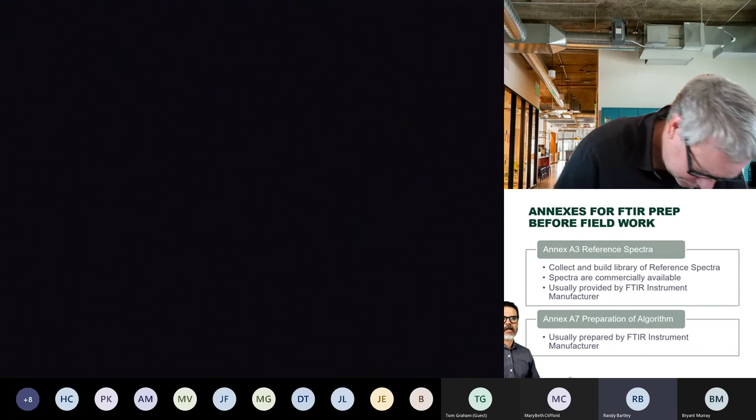So before you step out into the field, you're going to have Annex 3 and Annex 7 taken care of. Annex 3 is the collection of your reference spectral library. This is typically commercially available and typically provided by the FTIR instrument provider.

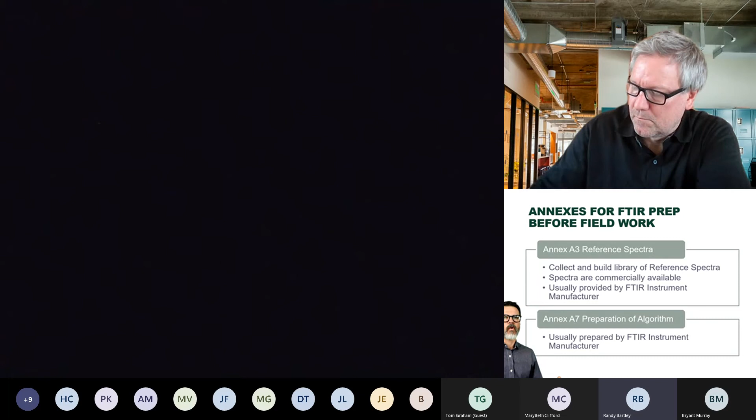So we use MKS instruments for our FTIRs currently. Their MG2000 software program has all of this loaded up for us. We can get our recipes for gas sources or diesel sources, modify the recipe or the method within the software program to look at different sources that are burning or running off of different fuel sources.

And then Annex 7 is the preparation of the algorithm to quantify the data that the analyzer captures on the day of testing, or during testing, I should say. So after you've got those, typically provided by the manufacturer, you would get into Annex 1, which would be your test plan.

And these are simple things like what's the applicability here? Are you testing against a regulation like Quad J? And if so, how many test runs are you going to do? 3 1-hour test runs with your sample being recorded every minute over the course of the 1-hour test run.

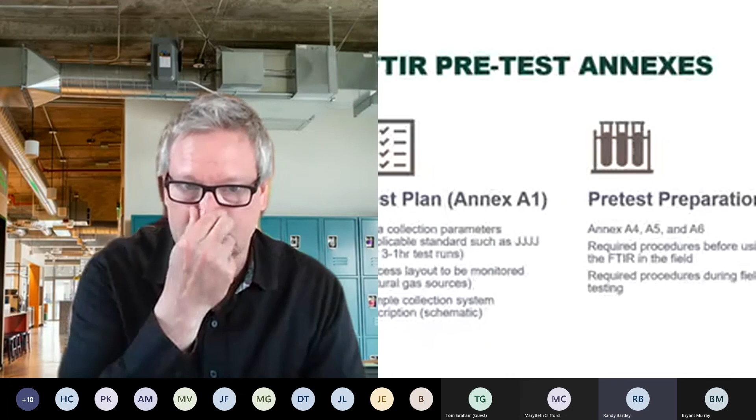You'd want to identify the source that's being tested. You'd want to have a process description of that source being tested. You'd have a schematic of your sampling system. You'd want to know how high the point of sampling is from grade and access to the stack and test ports. You'd want to have a good analysis of any safety concerns or safety issues before you get into the field.

Other things that you kind of want to know is what's the approximate moisture content of the effluent or the stack you're going to be sampling from, possibly want to know what the CO2 content is, and that will deal with some of the ranges in which you're going to look at during sampling.

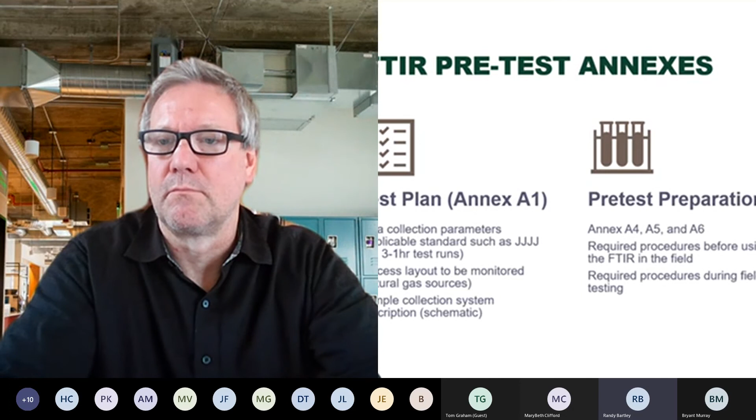Pre-test preparation that occurs on a daily basis in the field is kind of a combination of Annexes A4, A5, and A6. And I want to stop right there. Again, I mentioned these annexes don't flow linearly or in a process. When you look at Annex 1, that defines your pretest.

But these annexes kind of skip around. So if you're reading the method and trying to say, okay, I'm reading the data quality objectives in the annexes, it doesn't really go in order of how you actually conduct a test. So want to make that clear.

The way that we're going to present is actually in that process flow as to how you would want to prepare for and conduct a test.

So annexes A4, A5, and A6 have your pre-test requirements, starting with getting a background of your instrument in the field. So you flow nitrogen, you want to have a baseline level for all of your target analytes, for your moisture, for any tracer compounds that you're going to possibly use for your spike recovery.

And as a general practice or best practice, we like to take screen captures during these daily checks and dump them into our test report.

This was something that MKS trained us to do when we started using FTIR analysis. This was also something we used with Prism Analytical, which is now part of Montrose Environmental Group.

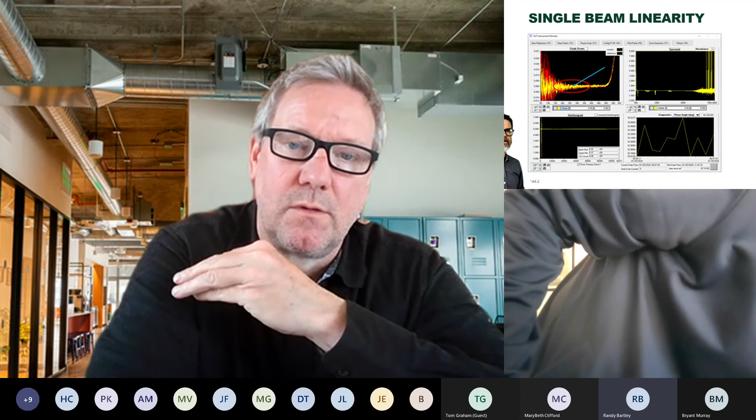We used them to do all of our Annex 8 data validations when we first started doing our FTIR analysis, and I know some of those folks are on the webinar attending today. So a lot of our best practices came from going through training with them, and we still stick by these practices.

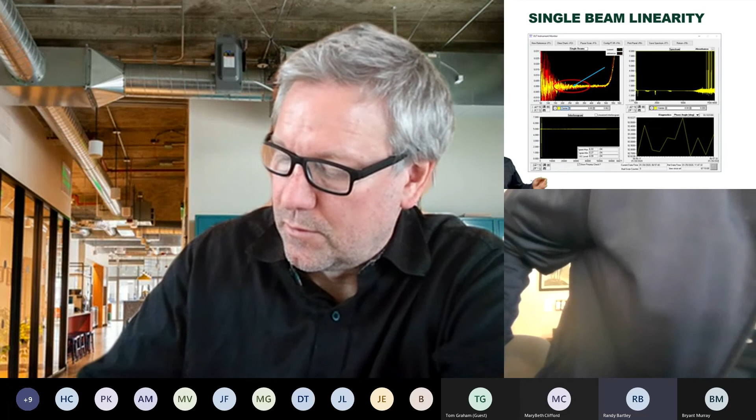So you'll find these screen captures in our reports looking at single beam linearity. What we're looking at in this top left portion with the red circle and blue arrow is the voltage of the FTIR at 250 inverse centimeters, and we're trying to make sure we're within plus or minus 0.005 volts. If we're not within that range, it means the analyzer is not linear.

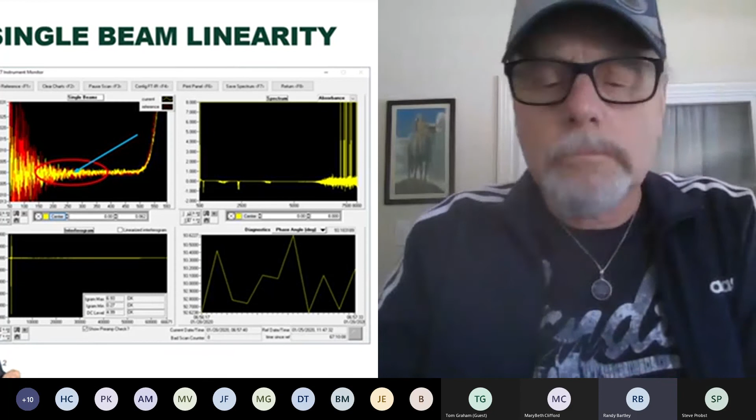I want to put this in the simplest terms as possible. With your traditional EPA reference methods, you would typically do a 3-point calibration for any compound of interest to prove the instrument has linearity. Well, with the algorithm and software here, if you're calibrating carbon monoxide at 50 ppm, you can stand by that calibration, and because of linearity within the software, the assumption is that if you were seeing 500 ppm of CO, the instrument is calibrated to that level as well.

Some other checks and screen captures that we put in: we want to see what the single beam max intensity is. Looking at the upper left-hand portion of the screen, circled in red, shows that we are at about 1.6 volts of single beam strength. When we drop below about 1 volt, we know our instrument needs to have some maintenance done.

We could have dirt, dust, or some type of particulate within the gas cell, or maybe we took a slug of moisture within the gas cell. It could have fogged the mirrors. You could have moisture contamination on some of the internal windows, all of which will affect the single beam strength. So as that intensity degrades, it's an indicator that you've got maintenance to do on the instrument.

And then one of the last checks we take a look at is the water peak analysis. This shows us how good the resolution of the analyzer is, how good our pictures of the spectral analysis are going to be once we take a look at this.

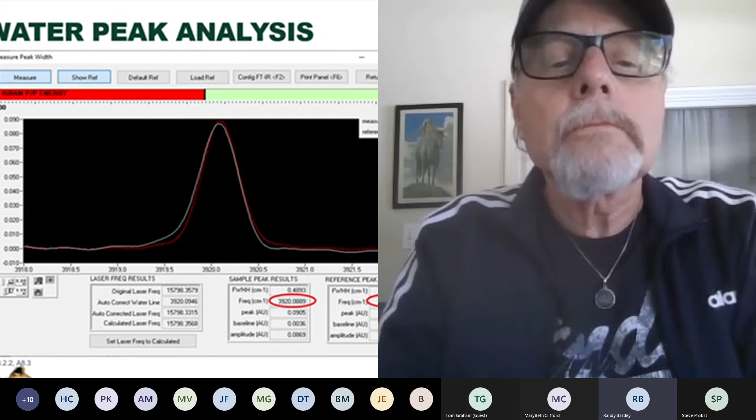We also look at the original laser frequency versus the calculated laser frequency, and the waterline frequency, and compare those. Again, these are very quick checks, taking less than 5 minutes to really take a look at these things, but they are indicators that if things aren't looking right, we may need to do some maintenance on the instrument before we can continue with our testing.

So continuing on with Annex 4, this is where we get into using a calibration transfer standard, typically ethylene as a calibration gas. This is a great direct in-system check on the analyzer. The method says we would run some ethylene or CTS directly to the analyzer, to the gas cell, and through the system. We're checking for leaks here, looking at system performance.

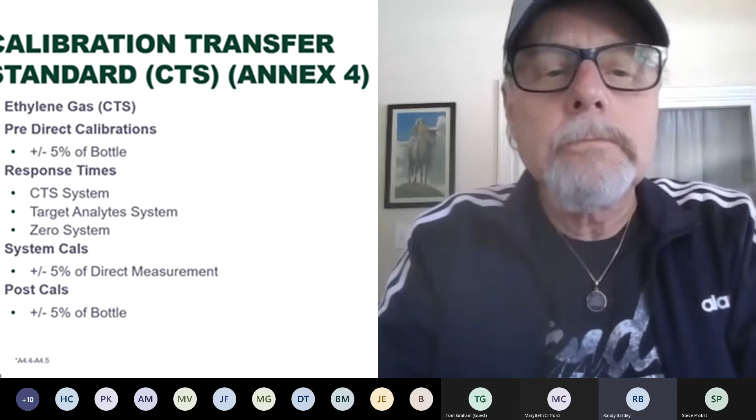We are also getting the mechanical response time of the sampling system. You can see on this screen the top box showing ethylene, showing the cylinder value, and the box below that the direct measurements. The pre-test CTS reading was 99, almost 100, and our bottle value was 96.3. We want to be within 5% of the bottle value there. So we do that on a pre-test and a post-test capacity.

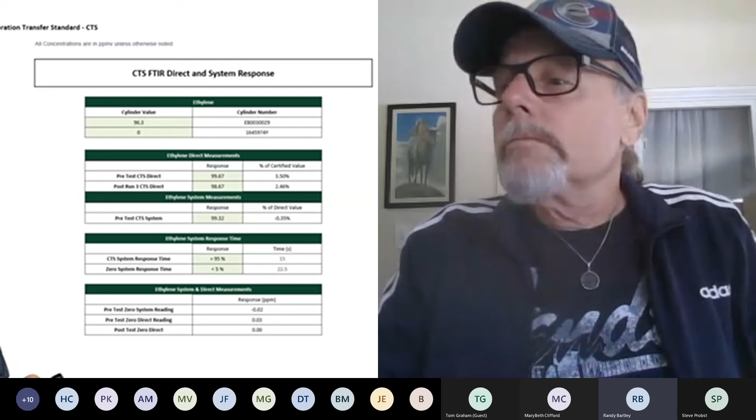And then we also do a pre-system test, again running the CTS, the calibration transfer standard, through the entire sampling system, getting our mechanical response time. We see here that we had a 15-second rise of the CTS through the system, 15 seconds for us to achieve 95% of the bottle value. Then we run a zero gas or nitrogen through the system to again see how long it takes us to drop below 5% of the CTS reading.

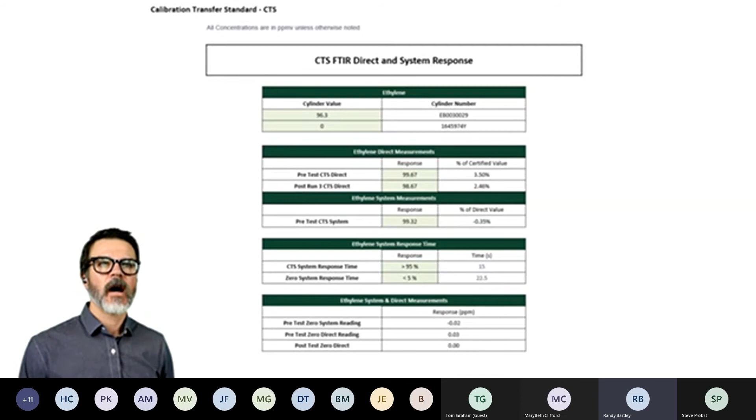So we do these checks again on a daily basis, and not only do we do them with ethylene as a calibration transfer standard, but we also take a look at all of our target analytes. For a Quad J test, you're looking at CO, NOx, and you'll use NO as a calibration gas. You'll look at propane for your VOCs, and then with Quad Z applicability, you'll look at formaldehyde.

Currently, you're allowed to use surrogates. So for formaldehyde, you'll get a calibration gas, and typically acetaldehyde is used as a surrogate. The reason being, acetaldehyde is a little more stable within a bottle, and you have a longer certification as far as that bottle expiring and not being able to be used.

So this is one of the elements that has been discussed in the rewrite committee—whether surrogates are going to continue to be allowed when there are commercially available, readily available compounds that are exactly what we're looking for.

So again, same procedure as the CTS. You do a pre-direct calibration, a pre-system check, get your system response times, and do a post-direct calibration. The post-direct calibration and pre-direct on your target analytes is not a requirement. This is something that we do as a best practice to ensure that we are seeing everything that we want to see within the test program.

So this slide again just shows from one of our tests that was conducted recently that we hit all of the requirements of the method. Feel free to review this at a later time—we really want to get into more of the meat of what we're looking at.

And this screen here, Annex 2—this is something that gets missed sometimes, I think, from service companies—is how to appropriately conduct your minimum detectable concentration for your target analytes per your test program. There are 3 different ways currently within the method to determine your minimum detectable concentration. We're going to walk through an example of MDC number 2, which is a very commonly used calculation of your minimum detectable concentration.

Essentially what you're doing is taking 8 samples through the system by running nitrogen through the entire system. You wait for all of your target compounds, your moisture, to equilibrate—you really want everything at 0 or as close to 0 as possible. And you set your scan time to an equivalent time at which you're going to be sampling for your test. So again, for a Quad J test, if you're doing a 1-hour test with recordings captured at 1-minute intervals, you'd like to do this MDC at that same 1-minute interval.

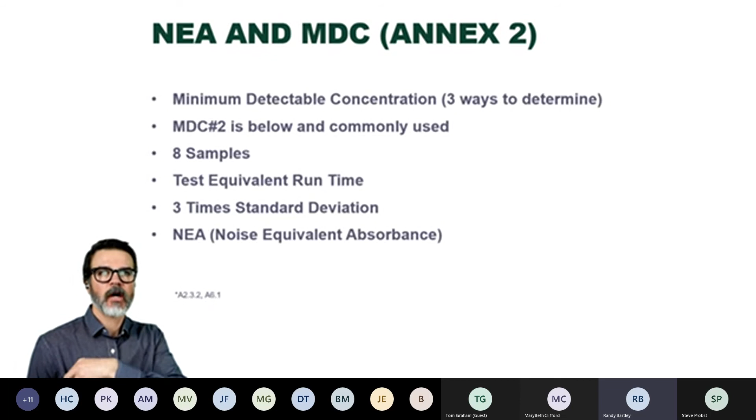This part of the pre-test calibration requirement takes about 10 to 12 minutes once you get everything to equilibrate. Essentially, over those 8 lab samples that you're taking, you calculate the average and the standard deviation—that standard deviation is your NEA, your noise equivalent absorbance—and then 3 times that standard deviation becomes your minimum detectable concentration for your analytes.

So what we've done here in this run screen is we collected data from over 4 days of testing to illustrate to the group that when you're doing your MDC analysis, these values are going to be different from one day to the next on the same instrument.

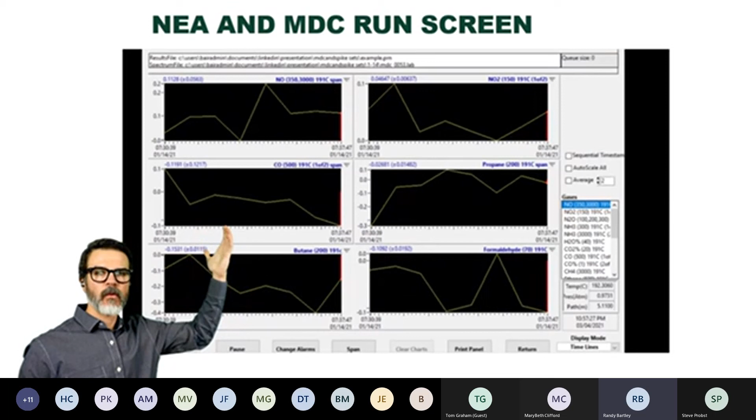So this is the same instrument, 4 days in a row, and we'll show this in a few different formats. Top left is looking at our NO, right here in this box is CO, down here at the bottom we've got butane, and then top right would be NO2, propane, and formaldehyde.

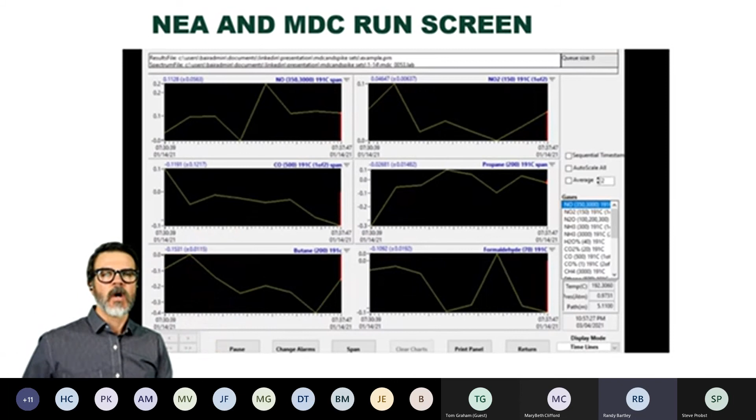So again, you can see in a run screen capacity, we can also take a look at this from a PRN... excuse me, it got hung up there. Let's see if this will run. Okay, so...

You can see here, if you look at the date column—I think we only captured 3 days here, January 11th, 12th, and 13th—you can see that we're getting the MDC each day, and we look at all of our target analytes. The PRN file is way too large to be shown all in this one screen, but you can see here you've got a good raw data log. It shows you your date and the time of sampling. Data logs, as you may or may not know, are required to be put into your test report.

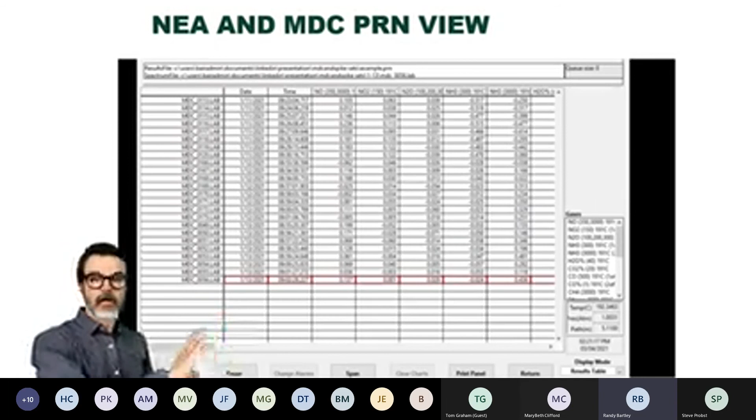And this is a great way for auditors to go and look at whether the data from the raw data logs lines up with any of the information entered into your summary tables or calibration tables. So very good information to have there.

Again, this is just one more way to look at the NEA and MDC tables over the course of 4 days, January 11th at the top left, to the 12th, to the 13th, and to the 14th. On a day-to-day basis, if you just focus on the CO column for these 4 tables, you can see that on the 11th our minimum detectable concentration for CO was 0.32. On the 12th, it was 0.21. On the 13th, 0.27, and on the 14th, 0.19.

Not great, not a whole lot of variance here, but it does matter because unlike your traditional EPA reference methods, your MDC is what calculates your system bias. So if you are not doing this on a daily basis, you are not able to report an accurate system bias on testing.

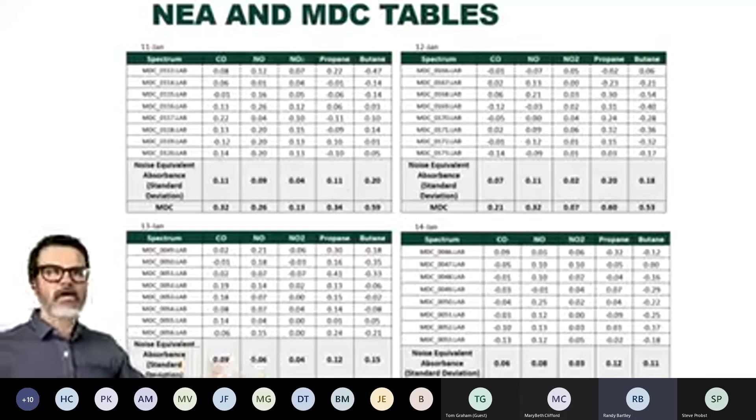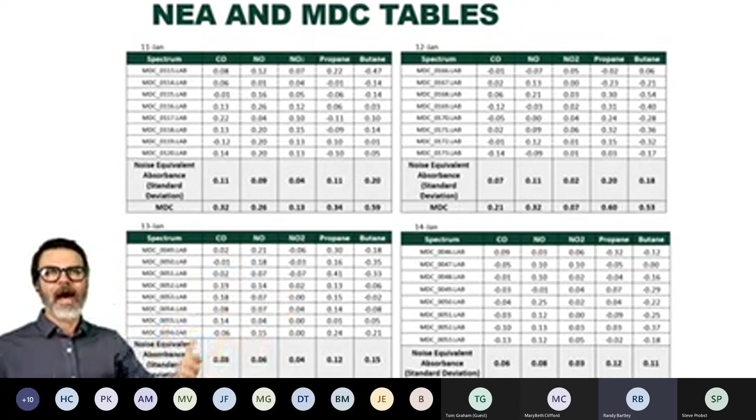When you're reviewing a report, if you see the same numbers reported day after day, and it could be an entire fleet of instruments, you would want to ask your service provider: how are you getting these numbers? Are these simply manufacturers' numbers provided for minimum detectable concentrations, or did you go through this process one time? This should be a flag to you if you are not seeing this process done on a daily basis.

Moving on to Annex 5, doing a spike recovery. This is done to test the transport system. We're looking for leaks here, and we're looking to see if we have an equipment malfunction. There are 2 primary ways that you can do this.

You can either use a tracer compound, such as sulfur hexafluoride. SF6 is commonly used as a tracer compound to do this check. If you don't have a tracer compound blended into a calibration gas cylinder with your target analytes, you can use mass flow controllers that are calibrated to NIST standards. There is a way to do it without a tracer compound.

It's pretty easy to get this done with the tracer compound, and I'll explain this a little bit more as we go through this. The tracer compound also helps to calculate a specific dilution factor.

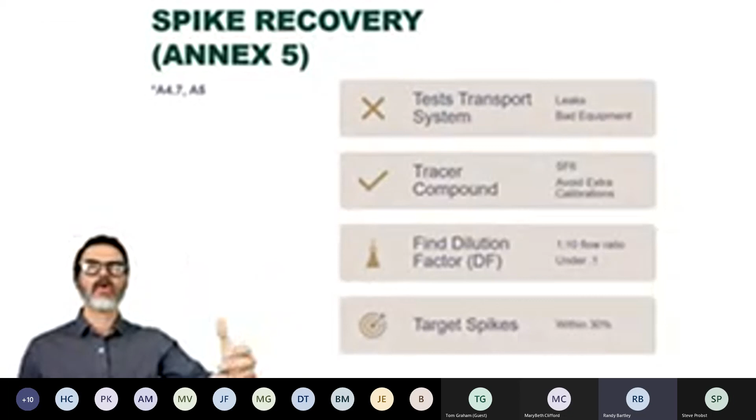So when you do this process, essentially, I'll try to put this in the simplest terms. The first part of this check is you position your probe within the stack, and you get a native concentration of what the stack is saying for the target analytes you're looking at. So you record data looking at your CO, your NO, NO2, propane, formaldehyde, whatever your target compounds are. You want to find out what's in the stack.

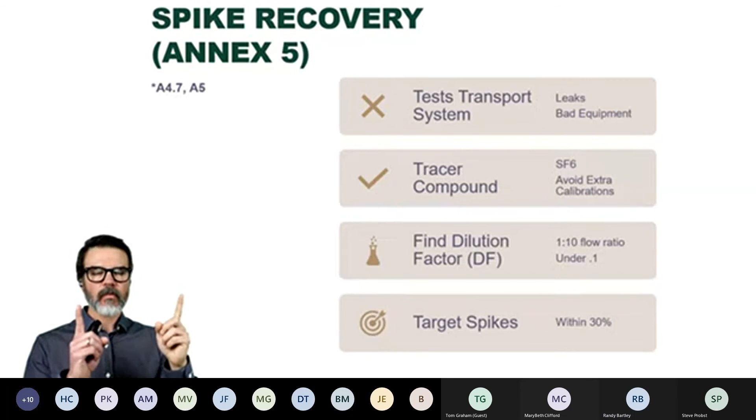Then you come back with a calibration gas bottle that has very high levels of those target compounds blended with a tracer compound like SF6. You spike that cal gas through the entire system, overflow the probe, and then you're looking for a certain value to come back for a specific target. You need to be within plus or minus 30% of an expected concentration.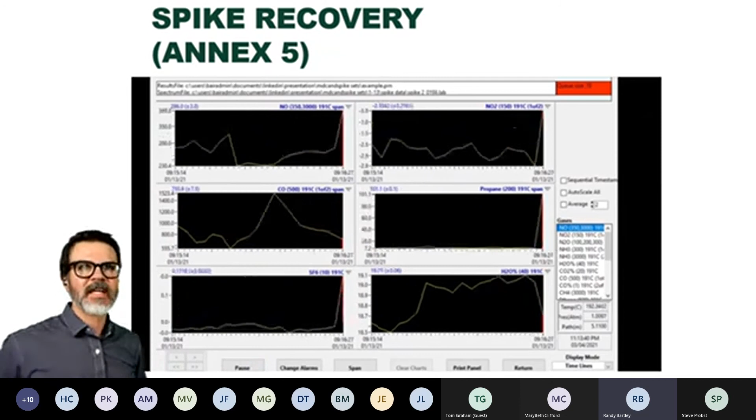So again, you can see this number rise, and you see all the other target compounds rise once you introduce that high level gas into the system. Feel free to watch this screen over and over again to get a better sense of what's going on here and seeing those analytes rise.

And that's important again regarding mass flow controllers if you don't have that tracer compound.

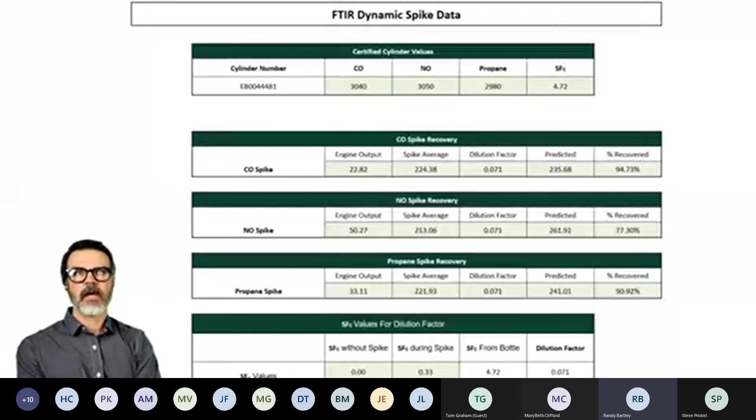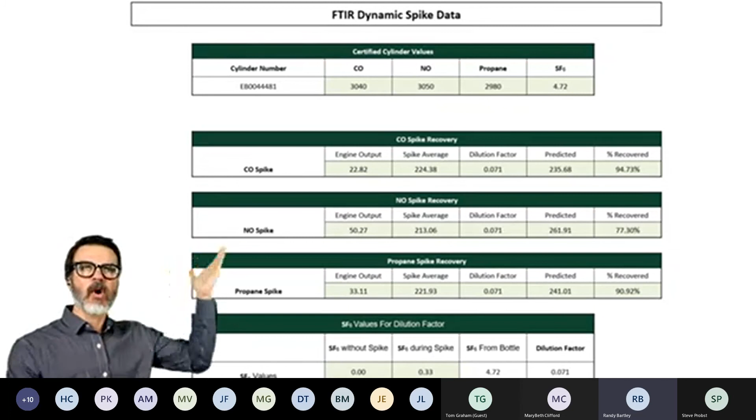So with the spike recovery, looking at the CO box, top middle of the page here, the engine output was roughly 23 ppm. And so we put in a high range CO level, 3,000 plus ppm, and we got a dilution factor of 7%. You want to remain below 10% according to the method. So you're getting 90% of your stack concentration and 10% of this spiked in cal gas. And so we predicted that we would see roughly 236 ppm for full 100% recovery of the system.

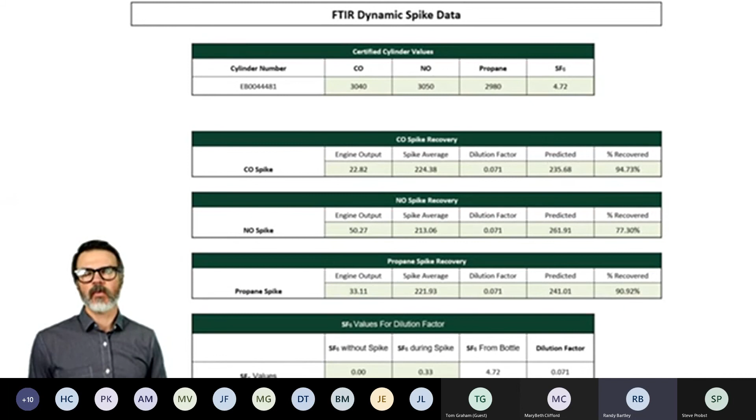On CO, for this spike recovery, we saw a 95% recovery. Again, you need to be within 70 to 130% recovery, or plus or minus 30%. So great recovery on CO, very, very well within the acceptable limits.

Our NO spike, you can see it was a little bit lower. Engine output was 50 ppm. The spike average was 213. The predicted value was 261, 262. We recovered about 77% here. And again, the dilution factor is going to be the same for all your target analytes when you have that tracer compound blended in with your SF6.

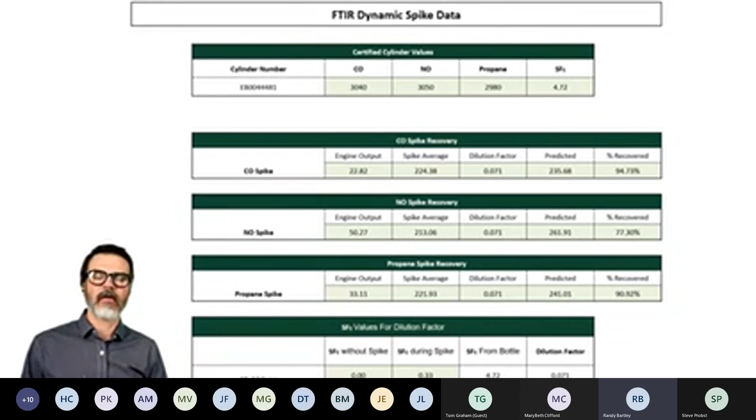A little bit of a complicated process. If we need to do some follow-up on this, or you have some questions as to how this procedure is done, happy to come back and revisit this as needed.

What you should see in your stack test report is cal gas certificates for all of your calibration gases, including the one that would have the tracer compound in it. And I've got a couple of notes here. You can see that the circle in red shows that we have the tracer compound blended in the same bottle as our target analytes, our propane, our CO, our nitric oxide here.

And then on the right side of the screen, a note directly from the method: use of a tracer gas compound such as sulfur hexafluoride, SF6, blended with calibration standards at a known concentration allows for accurate quantification of the exact dilution factor, which negates the need to accurately calibrate mass flow controllers and rotameters. It's important to use and accurately calibrate mass flow meters, mass flow controllers, and rotameters used during the procedure if a tracer compound is not present in the spike gas.

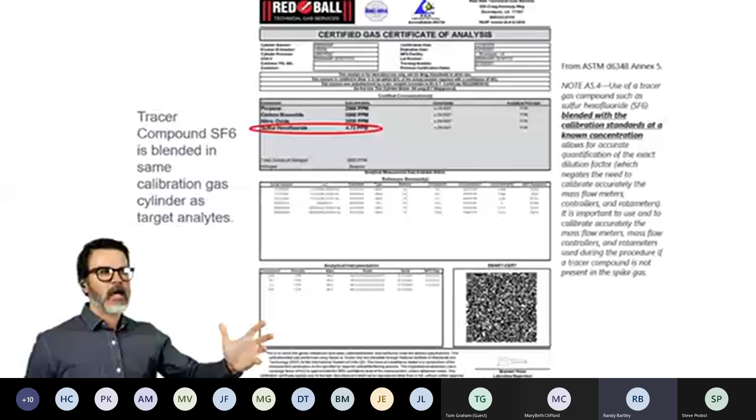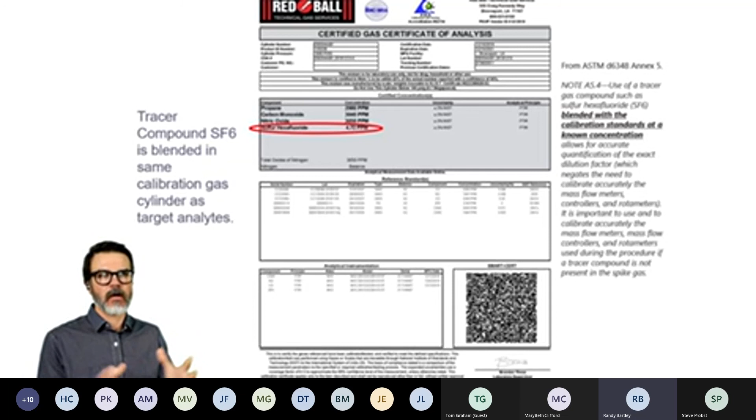So one of the things that came up, a question during a recent SES, Source Evaluation Society, webinar was: what happens if you're trying to do a spike recovery on propane, but your SF6 is in a separate bottle with a different target compound? Well, it comes back to this point. Without that SF6 being in the same gas cylinder, you'd want to talk to your service provider, the testing company, and say, how did you do this? Do you have accurately calibrated flow meters in order to run two bottles and have an appropriate mix in order to calculate your dilution factor correctly?

And then the state agencies or the EPA have the opportunity to come back and say, we would like to see your NIST certifications or calibrations on those flow controllers and rotameters, to make sure that you are able to do this accurately and that your flow controllers are up to spec.

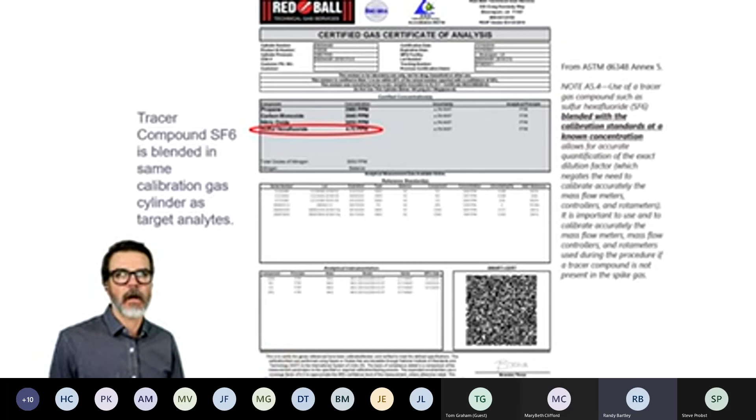So moving on and getting to the big booger of this whole presentation, manual validation under Annex 8.

So back in November, I tried to bring to the platform that Quad J regulations state that if you're going to use ASTM D6348 as your method of analysis, you need to report the data from Annexes 1 through 7. And for some reason, Annex 8 is not written in Quad J tables or regulations. So I scratched my head a little bit, talked to the EPA about it, and asked, was this a typo, was this missed? The correspondence that came back was no, it's absolutely supposed to be a part of the comprehensive analysis if you're using this method, and without going through Annex 8, you are not able to quantify the data accordingly that you're presenting from the previous 7 annexes.

So what this method or annex does is verify that the FTIR software capturing data in the field was capturing it accurately. The method says you need to validate 2 spectrum per test run.

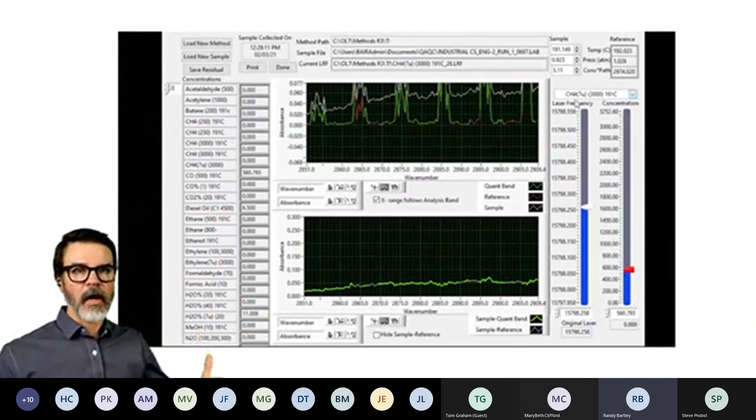You're mitigating all potential interferences. You're trying to get that quant band to remove all the peaks for that target compound or analyte. And you do this again for every target compound of interest or potentially interfering compound. You would take 2 spectral files per test run.

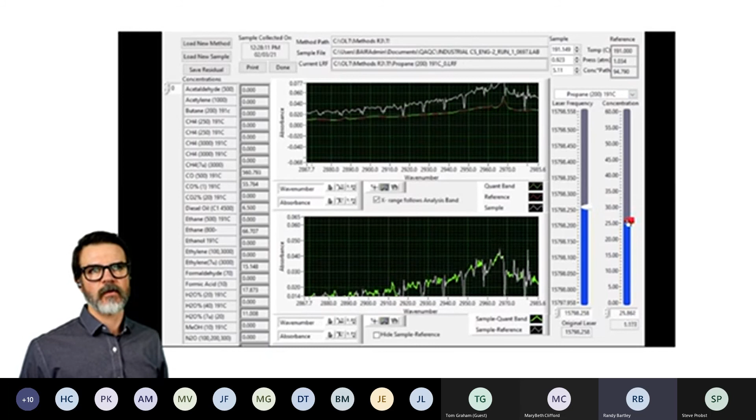So this is a little bit of a complicated process to learn. When we started doing FTIR analysis, we sent this out third party to Prism Analytical. We've taken it in-house as of 3 or 4 years ago to do this our own. As you can imagine, if you go third party, it's expensive per data set that you've got to take a look at. And again, if you bring it in-house, you still have those expenses, but hopefully find a little bit better of a return. But the point is, this has to be done.

And a best practice in reporting this is, again, to take a screen capture of your final values for a target compound and dump that into your report so you can show this process was actually done. It may be hard to see on some, but there are actual time and date stamps at the top of this, so you can see this was from that date of testing.

You can identify within your report which spectrum files you took a look at for manual analysis, and auditors can compare, okay, it was lab number 400 or whatever the lab number is. So again, it's just proof, evidence that you've gone through this process.

Some 2 software utilities have been created that have offered a little bit of confusion. One is an automated validation utility that can run concurrently while you're doing your FTIR analysis in the field. This will check your pressures on your gas cell, your operating temperature on your gas cell, your single beam intensity, all of those screen captures we showed earlier in the presentation. It will run concurrently and make sure you're good throughout the entirety of your test.

But this is not to be confused—this AVU, this software utility, does not take the place of the manual validation that needs to be done in Annex 8.

And then recently, there's been a development of new software being provided to some state agencies. I don't know that all FTIR manufacturers have done this yet, but in some of the states that are a little pickier about reviewing their reports and want a full understanding, they wanted a utility that would allow them to request the spectrum files validated in that test report and do their own manual analysis, to ensure they can come close to reproducing the numbers reflected in the report—doing that manual scaling, mitigating the interferences, and finding values within 20% of what the FTIR showed on the day of analysis.

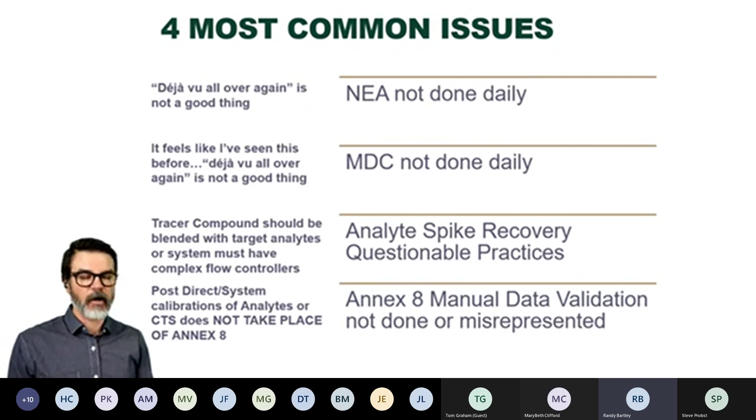And then Annex 8, the manual data validation—it's either not being done, or you don't see any evidence of it in test reports. You'll want to follow up, investigate, and find out if it's being done, or sometimes it's misrepresented, whether intentionally or unintentionally. I think there are some firms out there that may not understand the full requirements to meet the data quality objectives of Annex 8. For example, there's been discussion of test reports that show the post-test system calibration on your CTS as satisfying the requirements of Annex 8. That does not do it, guys. You want to be very aware of this.

So that's essentially our presentation here. I hope we've provided some clarity and guidance, and I'm happy to continue with that and answer any questions you might have.

So I am, let's see here, going to have to get in a position where I can read any questions that come through.

I can read them too. Okay, would you mind restating? And by the way, I've got a couple of my team members on as well, so I may kick some of these questions over to them as they're asked.

Yeah, I discussed credible evidence and really what to do with the data, how to interpret it, and what to do with some of our findings.

Yeah, thank you. And I think from MKS Instruments, regarding the software utility that's been created, Sylvie Charbonnet was the presenter on that, and maybe answered some of the questions as far as who owns that data, and what authority the state agencies have to request it.